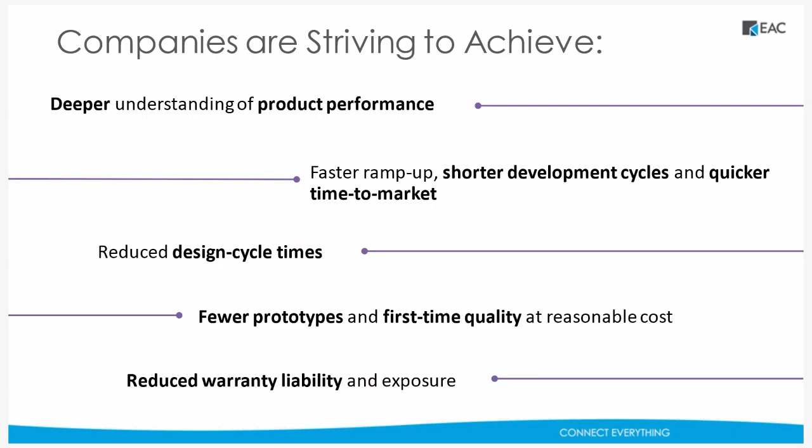So why is that? What are the barriers to simulation being used every day throughout the development process and by design engineers? Often, engineers feel like they don't have the expertise they need to run simulations while they design. They feel like they need to consult an expert they may not even have access to. Often, the expert's initial task is to figure out how to simplify a copy of the design model so that the simulation will run in a reasonable time, but still provide an actionable answer. Engineers don't feel comfortable making this judgment.

Additionally, we can all agree that the design process is an iterative one. Certainly, the design engineer would want to use simulation as he or she evolves the design throughout all these iterations. But this would require running a simulation that could take hours on multiple uniquely simplified copies over and over again. It's just not efficient and too disruptive to the design process. And because of this, design engineers just generally don't do it.

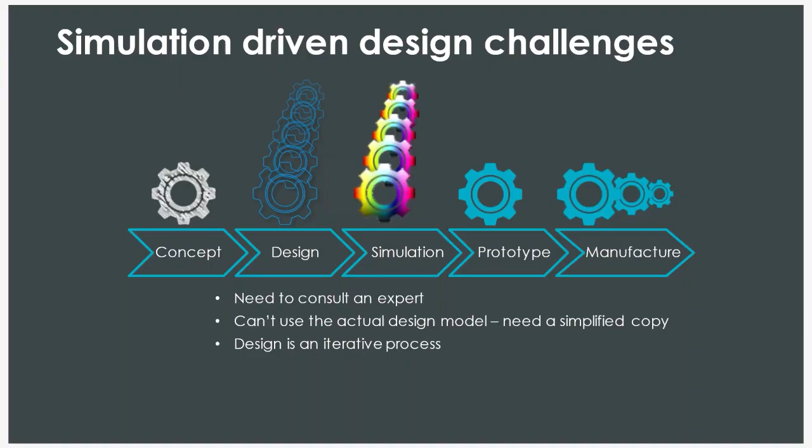This is the reason PTC partnered with ANSYS with the overarching goal to remove these barriers for product development teams. We're bringing together two leaders in their respective fields and delivering a single solution for our customers. We're going to remove the barriers we've just referred to.

So what product development teams really need is a simulation tool that is so fast, so responsive, so simple to use that it can literally keep up with the design engineer's every step of the way. No copies, no waiting, just simulation results right there throughout. A set of simulation capabilities that can be pervasive across the concept and detailed design stages of the process. Our new partnership with ANSYS gives us the opportunity to deeply integrate their breakthrough technology into Creo and make this need a reality.

This new product is called Creo Simulation Live. This is the solution that gives every design engineer what they need to truly achieve simulation-driven design. The ability to instantaneously understand how design changes impact product performance is truly groundbreaking and only available with the solution that we're bringing to market in Creo. It uses a unique technology approach to deliver simulation results interactively as you design.

This solution will complement our existing simulation offerings that focus more on the analyses that require higher levels of fidelity or are used as a final validation step. Let's call them the more traditional analysis that teams might currently use, represented here by our Creo Simulation extension that could just as easily be an ANSYS offering. Now let's take a look at Creo Simulation Live in action. I'll pass things over to Emily so she can show us what it can do.

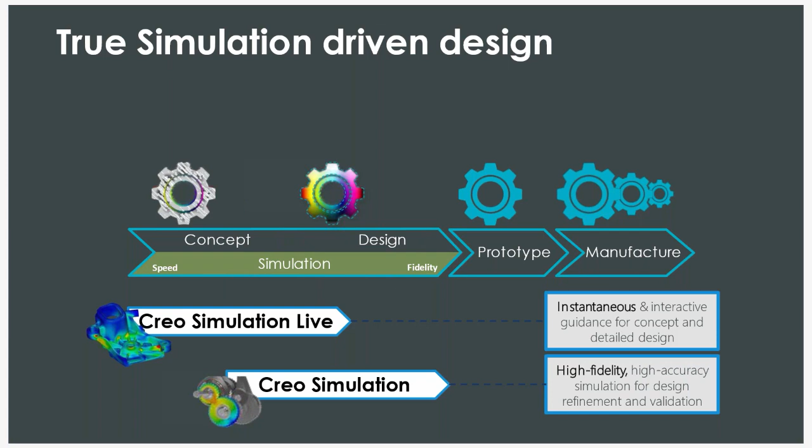I work for PTC in the Virtual Center of Excellence, and today I'm going to show you a demonstration of Creo Simulation Live. We're going to start with the structural analysis. So here we see our snowmobile assembly, our Polaris snowmobile assembly. This is a full data set, so very complicated. It's not perfect. You still have some bolts and interferences here.

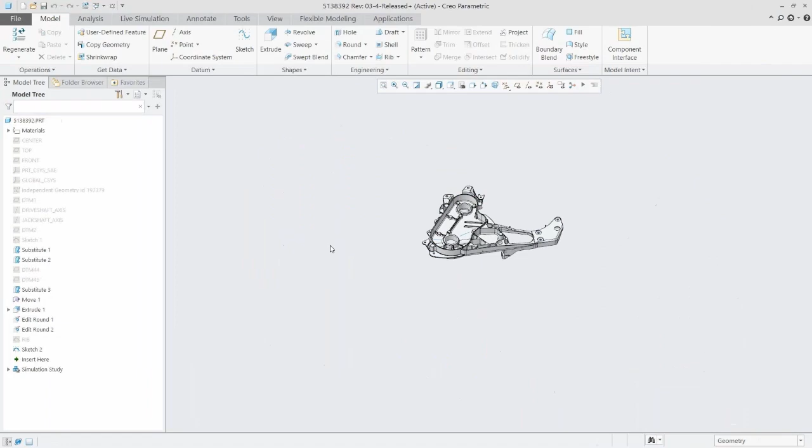So we're going to look first at a part of this, how we use CSL there, then move back to the assembly level, and then I'll demonstrate the modal and thermal analysis as well. So here, let's start by looking at this cast iron chassis. And we can zoom in to see that we have a material already chosen, but we're going to need to

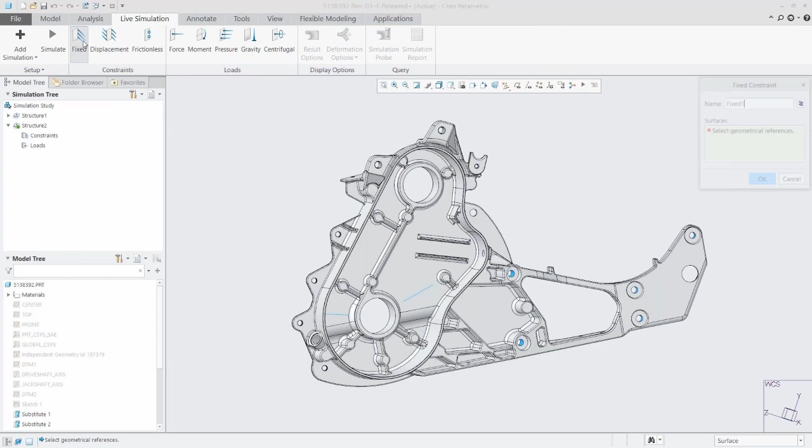start our simulation. So the first step is to choose between structural, thermal, and modal. Here we're going to choose structural. We see it pop up in our simulation tree. So first thing we have to do is set our constraints and loads. And this is very easy.

We just select the surface that we want to add our constraint to, and similarly with the loads, we can choose which kind of load we want to put on it. We can put it on whichever surface that we need to. So here we'll set our force components, and we can do magnitude and direction, and of course change our units. And as we do this, we see these show up in the simulation tree over there under structure 2.

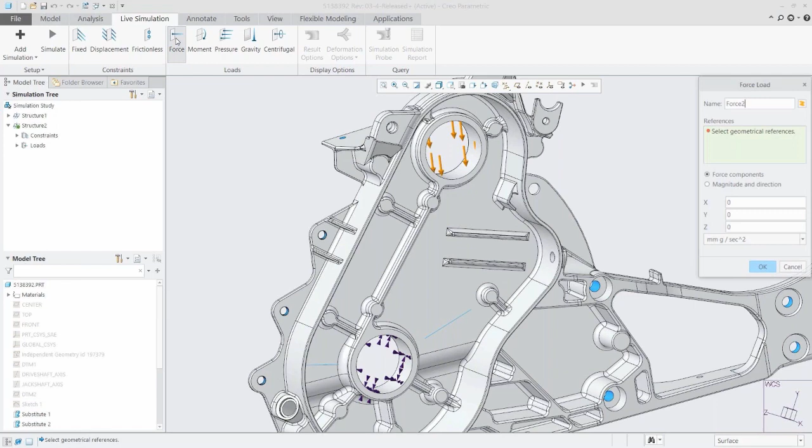So the way this works is if you set up a lot of simulations, all with different loads and constraints, maybe you have a thermal or a modal, and you can toggle between those as you need to. So setting this up, you're going to be able to use this later on. You're not going to be stuck to use it just now, just like Creo Simulate if you use Simulate at all. So let's add another force.

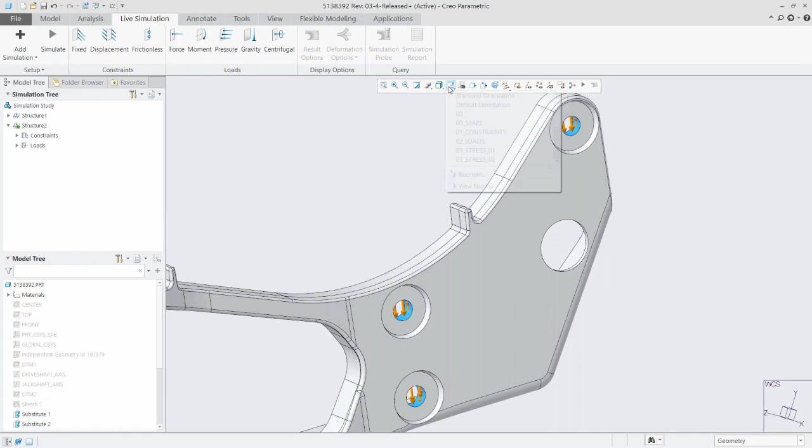We have here 3 surfaces with the same force load on it, so we can select the 3 of those at the same time, save a little bit of energy, and enter in our force components and units. So this is the extent of what you need to do to set up a simulation. We've come in to our part. We might have just been in the modeling tab.

We hop right over to our simulation tab with these tools, put on our loads and constraints, and then we're ready to go. You'll notice that there was no simplification. We don't have to take time to reduce all of these little rounds or anything. And it'll auto mesh for you, and it'll run it no problem in just a couple of seconds. So here we're going to hit simulate, and you can see just how fast these results pop up.

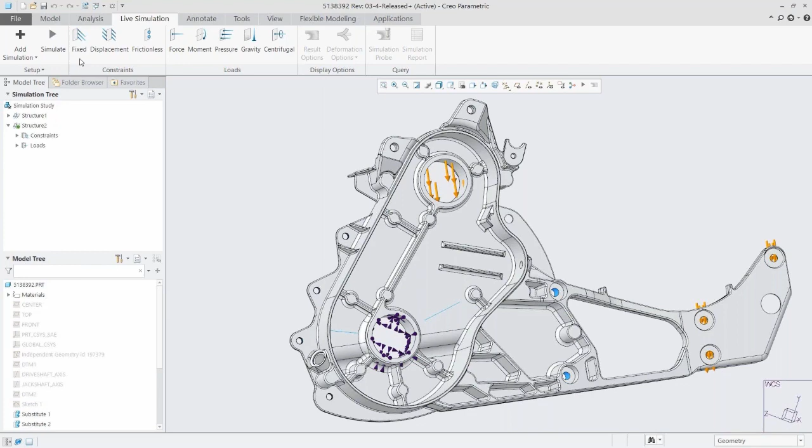So in a matter of maybe 5 seconds, we're already ready to view our result options. We can see here the von Mises stress. If we click on our result options button, we can see that it's the von Mises stress displayed graphically on our part. We have our legend in the right, and we're able to see the units there as well.

So what this does is this gives you a really good idea of how your design is going to behave, what kind of loads and stresses and displacements are going to be in it. And this is going to act as a guide for you to move forward to say, do I need to do more work here? Did my idea go as well as I thought that it would? Or am I ready to move on? Is this a solid part that I can move on with my work?

So let's first look here at the result types. We have normal stresses, shear stresses, principal reaction forces. We're going to look at the deformation. This is a fun one because we can animate it. So we have some extra options for deformation.

Here we can see the animation. This is our exaggerated view. If we want to get a little bit more of a true to life idea, we can check our true deformation box. And then we have to zoom way in and we can see what that will actually look like.

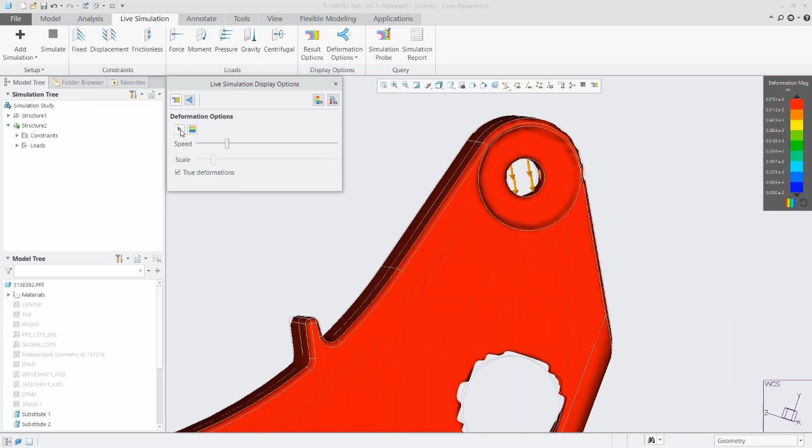So the point of CSL here is to act as a guide, to guide engineers forward, let them know, are there issues popping up as they're designing it. You have that traditional analysis stage that typically you have to make a lot of design decisions before you can see how it all kind of culminates in your design and how it's going to behave in that analysis.

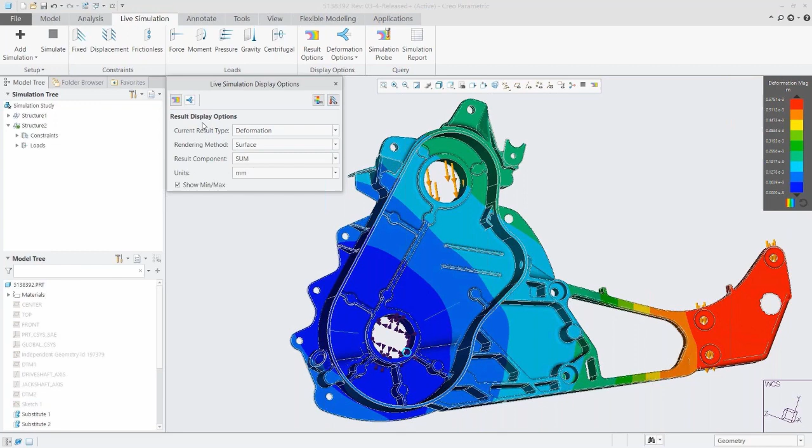The idea with CSL is that it runs here in the background while you're designing, so that it gives you a good idea of how your part's behaving long before you make big design decisions. So we'll see what that looks like. We'll come back into our von Mises stress. We'll change our units over.

So this kind of wraps up the basics. We've come from our modeling tab. We've started the simulation. We've set it up. We've run it, and we've viewed the analysis results. So now let's look at how you're going to actually use that in your design process to really get the value from this product. So we can zoom in.

We see we have a maximum there. And we want to see a little bit more information. So we can click a simulation probe and put it there, just to make sure that our stresses are where we want them to be. The legend can be a little bit more vague. So we can see that our von Mises stress is about 55 megapascals.

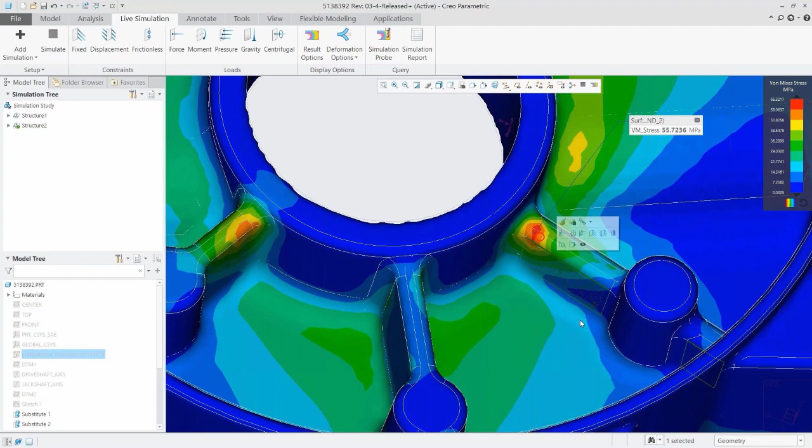Well, right off the bat, we could tell that's too high. I don't think that'll pass the final validation. I think that we could do better. I think the stress here should be a little bit lower. So we're going to start by making some edits, and we'll see that we're using flexible modeling, but you can use whatever tools you usually use to design. And when we hit accept, we're going to see it update in the background automatically.

So as that design change is accepted, we can see that our stress has lowered to 52 megapascals. So, okay, great. That's the direction that we're going for. It seems to be working, but I don't think it was quite enough. So maybe you want to make some other changes. Again, if you model parametrically here, you can model however you typically do. You have your full modeling environment. You can go back over to your model tab or your tools or wherever you want to go.

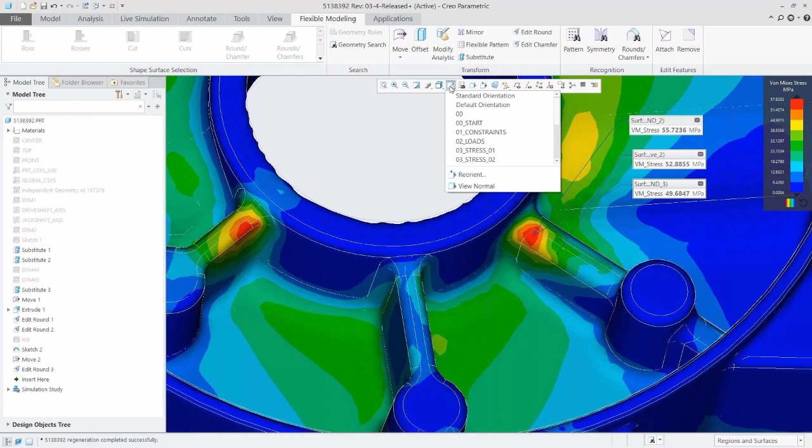But now you're able to see, after you've made those changes, okay, my stress here is 49 megapascals. That's perfect. That's right where I want it to be. This isn't going to give me any trouble later on. I'm not going to run into any issues with having to go back and fix this rib later in the design process. So that's really the idea. So we can move on now, confident that we've made a really quality part and that rib is really optimal for where it needs to be. So we can see our maximum stress has changed down into that arm.

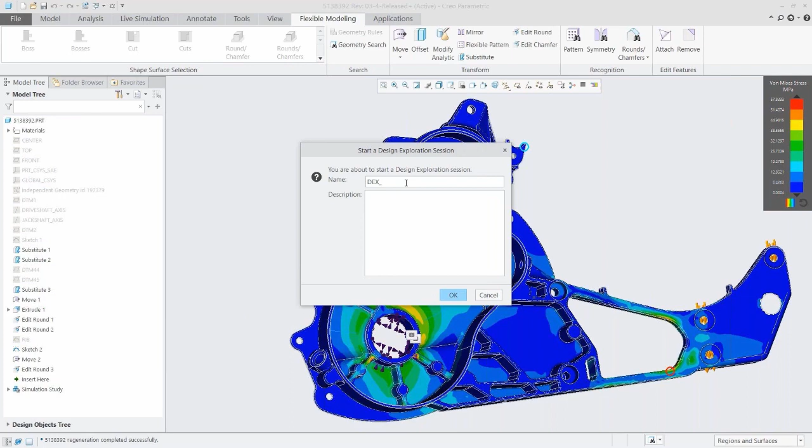So talking about another extension that works really well with CSL, we have our design exploration extension. What this does is open a design exploration session. And this is a tool for helping you manage different versions of your model. CSL is all about informed engineering. You're informed early in the design process, optimizing, making the best quality parts, trying out new ideas and seeing the effects. And design exploration session is about all of those same things as well. So they work really well together.

So what it does is it brings in this entry checkpoint, which is your model when you've opened the session. And then you're able to make design changes to your model and save them off as different checkpoints as you go through. So if you have a bunch of different ideas and you don't want to create a bunch of different files, all branching off each other, you can do that here in the checkpoint tree, and then you can toggle between them and see all the different versions of your product that you could make.

So, let's say, for example, we want to reduce that stress on the rib a little bit more. We have a new idea. What if we added a trajectory rib? I haven't done this before, maybe, but let's see what it does. So first, let's put a simulation probe. Our concern is that maybe the stress in this center section would be too high if we put another rib in. But with CSL and with our design extension, it's not going to take much time for us to try out this idea.

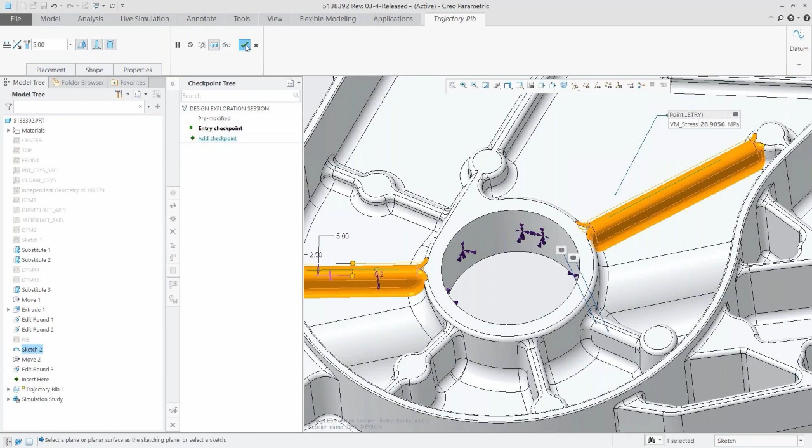So however you normally model, we're just going to put in a rib, and pretty soon we're going to be able to see those results. So not only can we see what it looks like with a new rib, but because it updates for us, we can see actually what the stresses are, what that rib did to the behavior, to the performance of our model. So this is really valuable information. You can try out some new daring ideas and see right away, are they working, are they not working? And you can make sure that your part is really optimized, really the highest quality product that you can make.

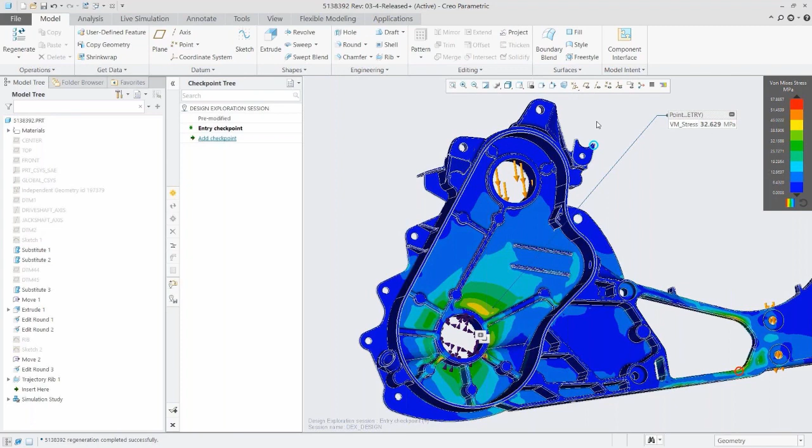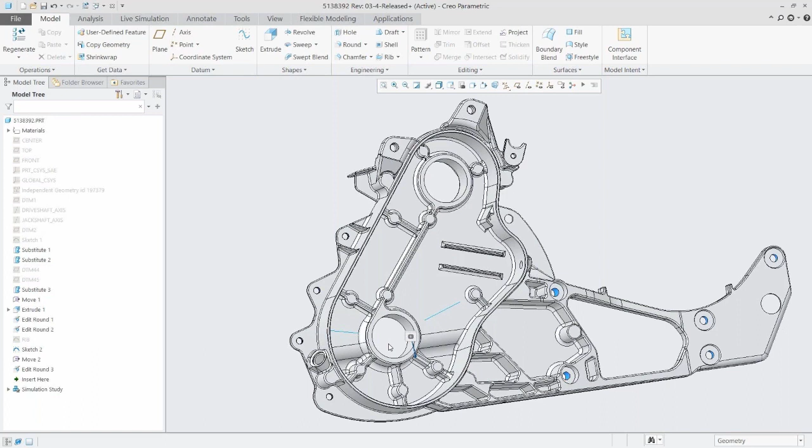So again, just guiding your engineer. If you want to save this as a checkpoint, you can review it later, maybe in a design review, or you want to go in a different direction and try out a different change, or we can save it and review that session later, or we can exit out like I just did, and we can see that the changes haven't been saved to our official model. So there's no risk of losing this official version, the version we came in with. And that's really the great thing about design exploration, is it can keep track of all that for you.

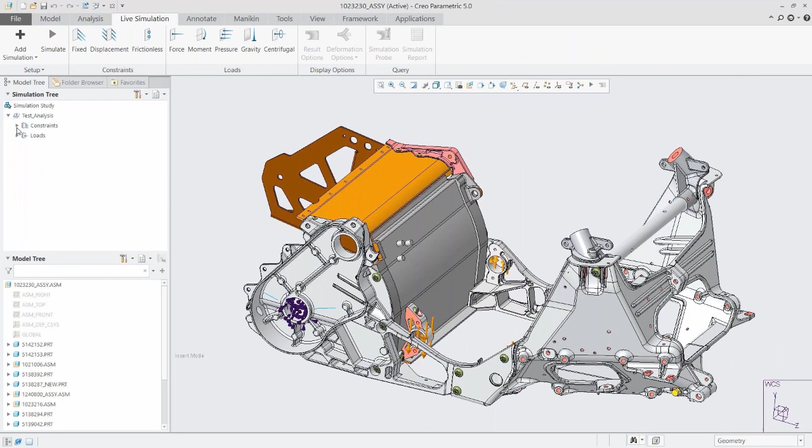So let's move back into our assembly level. We'll look at the structural simulation here. So this is going to work the exact same way. So structural on the part or the assembly level, CSL doesn't really care. We can see that we already have a simulation set up. So we have some constraints and we have some loads already placed on our model. And this will run just like the part level did.

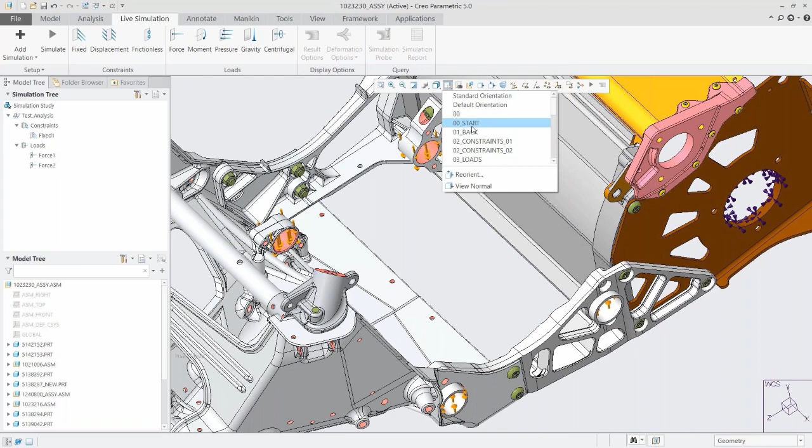It might take a couple extra seconds because it is this huge assembly, but you'll see it's so much faster than traditional analysis, and that's for a lot of reasons. It also auto meshes this whole thing without simplifying. So there's no simplification that needs to be done. This isn't a perfect model. Of course, there's issues with every large assembly.

And CSL doesn't really care. CSL is going to be able to auto mesh this. It does treat it as a whole bonded assembly. So you're not going to be able to see interactions between parts. Small gaps are going to be closed. But that all kind of goes in line with how this is used as a guide, not as that final step.

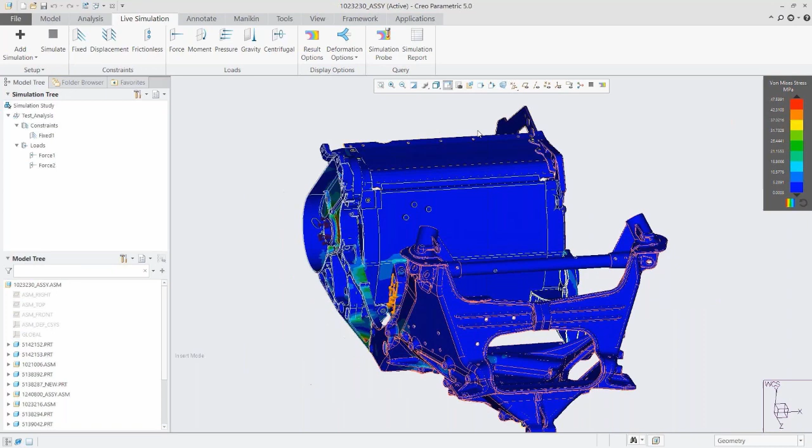So here we'll click simulate, and we'll see, in just a couple seconds, we have our model with the analysis already displayed on it. So our result options are the same. We can look at a different rendering method if we want to. We can see here that our max value is still right there in that piece we were looking at earlier. And our deformation. So let's see how our model is going to behave, get a good idea for what this is going to do in real life.

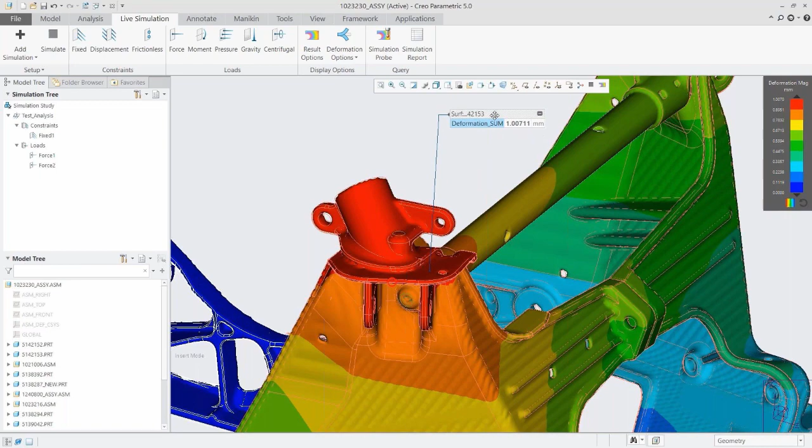We can see that this front corner has quite a large deformation. And at this point, then you can take that information and do with it what you want. So here in this example, we're going to bring in some suppressed parts and see how that helps. So we're going to put a simulation probe so we know exactly what's happening while we make these changes. And you can make any kind of design change. You don't have to bring in suppressed parts or a suppressed subassembly. You can alter parts right from the assembly level if you want. But this is a really great way to check how well your design's working.

So if we built this apparatus to reduce the deformation, we want to see, is this effective at doing what we want it to do? So we'll watch the deformation as it updates. And we can see already here, our deformation has dropped to 0.3 millimeters. So that's a pretty good indicator of whether or not our design's going the direction we want it to, or if we need to do more work.

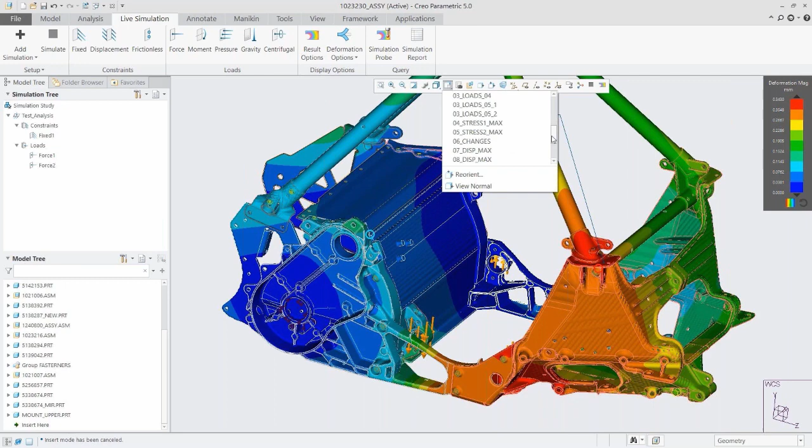So again, getting you through that final step, that final validation analysis, that analysis that's so refined and takes so long to run. By the time we get there, we're going to know that everything is running the way that it should be. There are not going to be any surprises. It's going to pass that validation step the first time we get to that analysis. So getting our products out faster and at a higher quality.

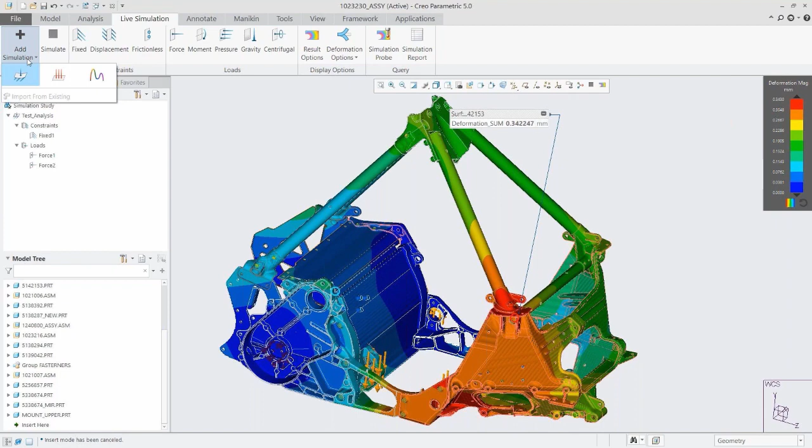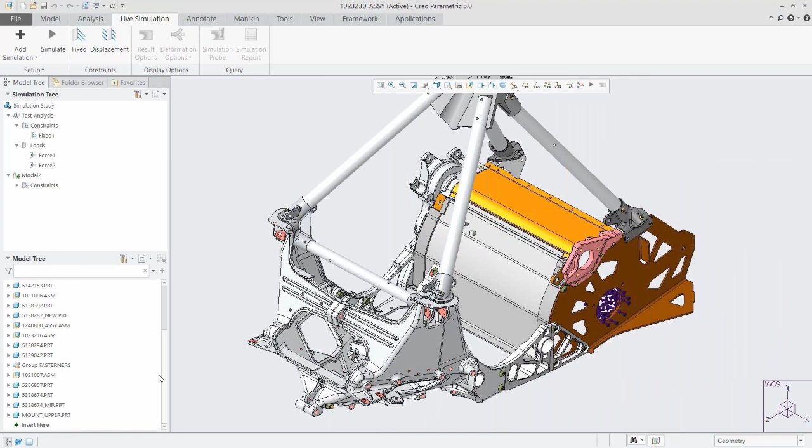So let's look at the modal now. Again, it's very similar. They're all very simple to set up. A little bit different here. We're going to set the constraints in the same way, just choosing the surface that we want, and then using our little menu here to select OK. But our loads are different. So with modal, we're not going to add the loads like we did in structural, but we can look at the difference in our assembly, before and after we put in this subassembly. So let's take that out and let's hit simulate.

And again, even with this whole large assembly, we can already see the results up and running. And these are very accurate results, by the way. They're just a couple percentage points away from the accuracy of other simulation tools, traditional analysis tools. The difference here is that it's a little bit more simplified controls, so it can be fast, it can be efficient, it can be easy for engineers who don't typically use analysis to work in the background to give them that information while they're working on it.

So we'll look at mode 1. We can see our deformation up here is about 50.7.

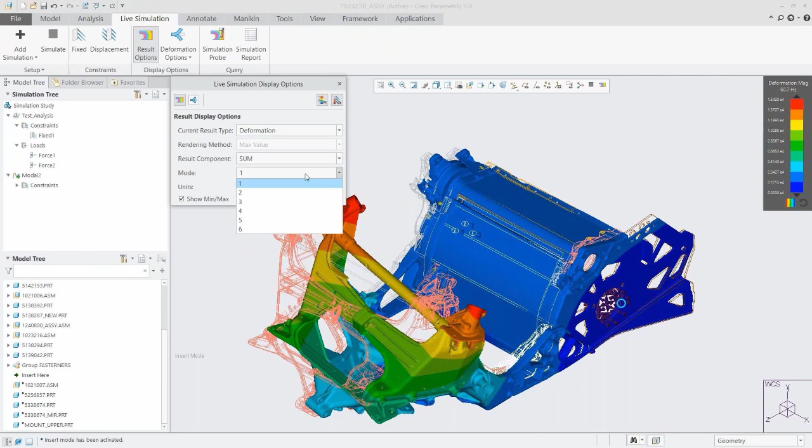If we animate that, we can see what it looks like, giving a good idea of how this part's going to move. Then we can go check mode 4. Again, you have modes 1 through 6. So whatever it is that you want to look at, you're going to be able to do right from this results display window.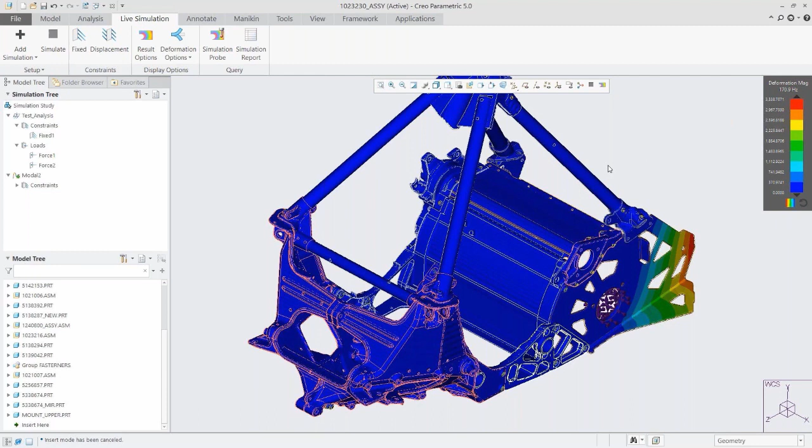So now that we know what it's going to do here, before we add those parts in, let's bring them back and let's see the difference. Let's see what it does. So right away, it's already updating. We didn't even have to select anything. We've just brought them in, and we have our results. You can see we're looking at mode 4, and our deformation is quite different. We animate it, we can see the effect of that.

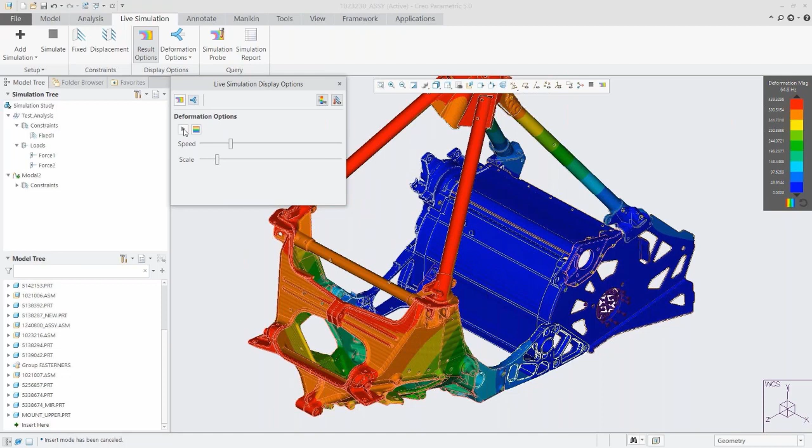It's pretty obvious. And then when we go back to mode 1, we're going to see, what does this do to the front of my part? Well, that's even more different. That's a very big difference from before we had this subassembly. And so, if this is going well, then you'll know that. And if not, you're going to be able to make that decision.

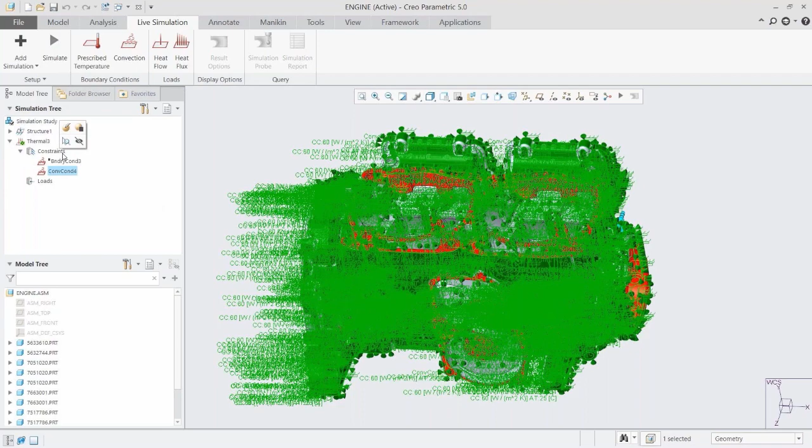So let's move now into the thermal. We have pulled up here our thermal. We have an engine to run a thermal analysis on. If we come into our simulation tree, we'll see our constraints and loads. We already have some boundary conditions set here. We have a convection coefficient and a bulk temperature, and it shows you on your model graphically what you've selected, so you can have an idea of if you've set your conditions correctly or not. And then you can change your units, of course, and then we'll add our loads.

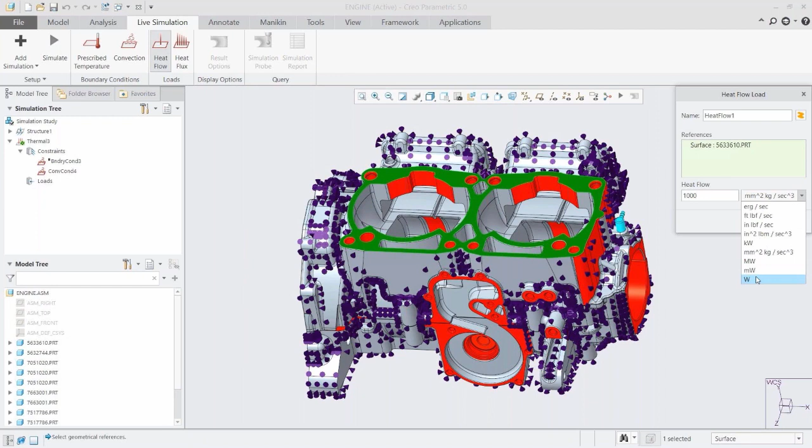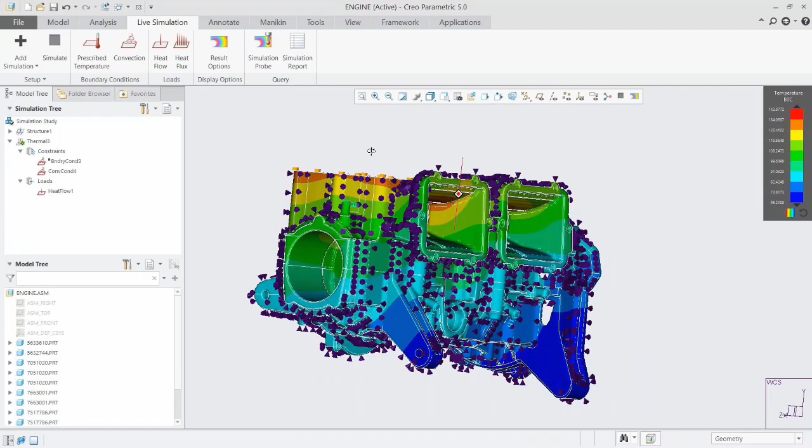So we have a heat flow or a heat flux, depending on your situation. We just choose the surface we want to apply it to, enter in our magnitude, choose our units, and we're ready to go. So no simplification here either, just ready to roll right out of our modeling tab. Let's hit simulate, and we can see our results are already complete. This one ran even faster than the structural, it looks like, and we have all of these great bars that show us which temperature zone we're in.

Of course, we can change that. We can change the result type. We can look at different rendering methods. We can look at composite or inverse surface, or just the surface if we want to know surface temperature. We can play around with the legend a little bit too, dragging those bars if you want the red zone all above 130 degrees or something. You can pull that bar down, and it makes it very easy for you to see your maximum and minimum values.

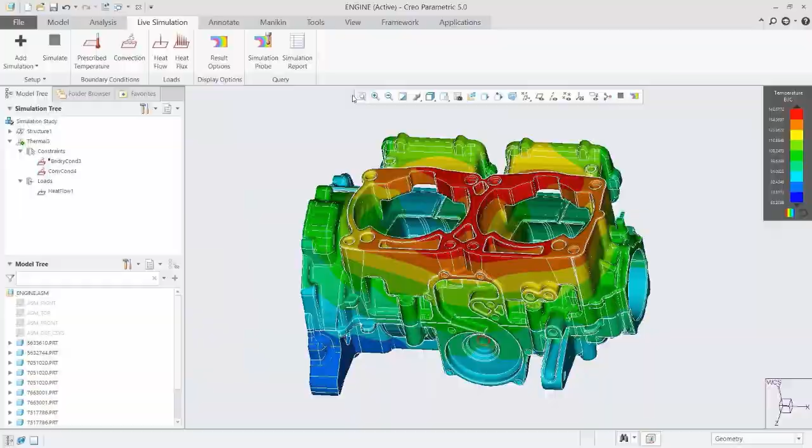So I hope this gave you a good idea of what CSL is used for, how it's useful, how to run it, and what's involved in that. I can come back into our PowerPoint slides, and I can pass it back over to Shannon.

Great, thanks so much, Emily. So just to cover a few points on the product capabilities, Creo Simulation Live will enable you to understand the impact on your design or product as fast as you make those changes. It will deliver this with speed, providing instantaneous results as you make design changes, just as we saw in the demonstration. It's also very easy to use. You saw how simple it was to set up and run the model and start seeing those results.

It runs truly integrated within your design environment. No exports, no copies, no extra files, just see, design, and gain insight as you work. And of course, it's interactive, so there's no waiting for the simulation to complete after you've decided on your changes. It will support structural, thermal, and modal. We're also focused on linear problems.

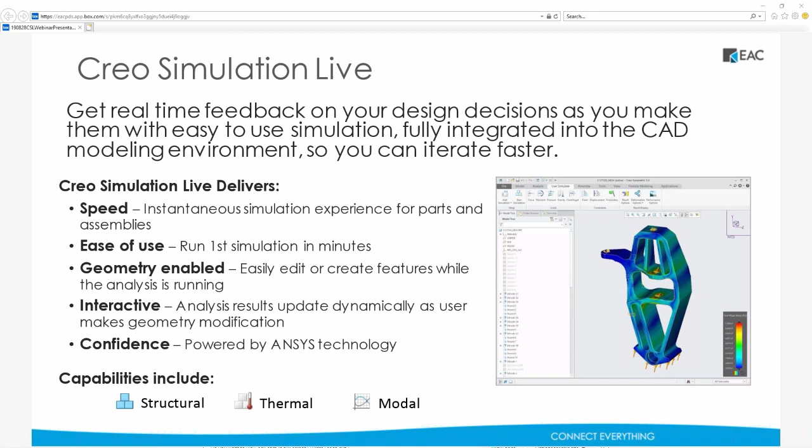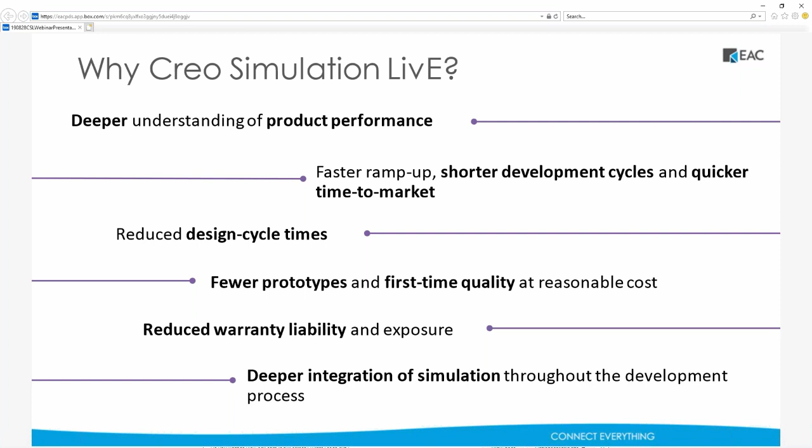So why Creo Simulation Live? You'll remember at the start of this presentation, we outlined several areas that customers have indicated they're trying to address and improve. As you can see from what this solution can do, we can support all these efforts by creating a deeper integration of simulation into the product development process, ensuring that every decision you make can be guided and done quickly to keep up with the speed of design.